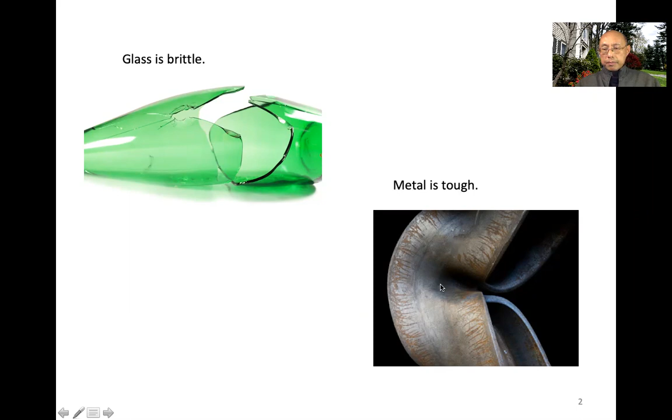We all know glass is brittle and metal is tough. The toughness in metal comes from plastic deformation. Rubber always appeals to people as a tough material, but it doesn't come from plasticity. Toughness doesn't come from plasticity.

So I'll call it elastic dissipator in the following sense. When material is being stretched, before fracture, there is no plasticity. When you release the load, the material releases elastically. However, if material is ruptured, all the elastic energy is dissipated. So this mechanism is what I will call elastic dissipator.

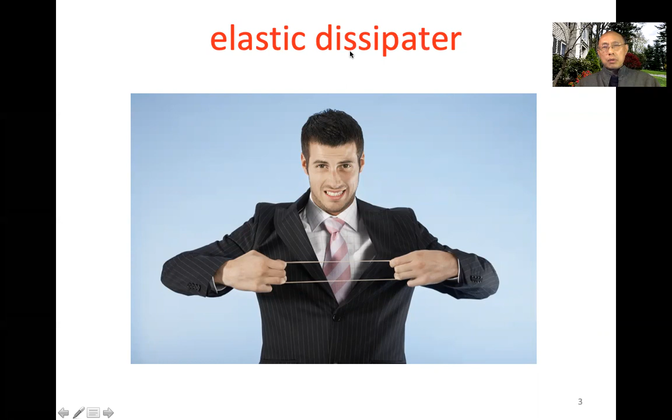Now, if you put this in the general context of a theory of fracture, you can think this way. It's well known, Griffith's theory of 1921, almost 100 years of history. Griffith considered glass as a model material, silica. Here is a glass, let's say just a simple model picture. You have an atomic bond between these two atoms.

So when a crack comes along, the crack only needs to cut one layer of atomic bonds. All the other atomic bonds remain bonded and the material is elastic. As a result, because you only cut one layer of atomic bonds, the toughness is very low. This is an energy per unit area of a crack, just about 1 joule per meter squared.

Now, we all know, if you have studied fracture mechanics, in 1948, Irwin and Orowan had a picture of a high toughness material. They were talking about steel. So the toughness is on the order of 10,000 or even 10 to the 5 joule per meter squared.

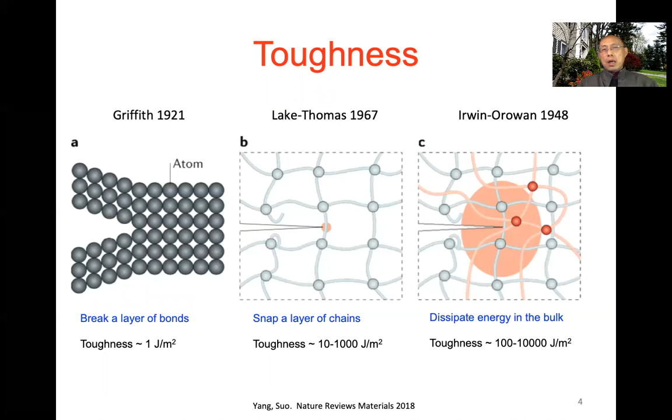So in recent years, myself and several other groups have been trying to create tough hydrogels. Here's one version we published in 2012. So the hydrogel is really very tough. Here is a hydrogel. Hydrogel is transparent. What you are looking at is a black background.

So we can stretch this hydrogel to 21 times. You can see, 21 times, very tough material. In order to measure toughness, fracture energy, we also use a blade to cut a crack and then stretch it 17 times. The crack does not grow. Instead, the crack becomes a hole. So this corresponds to very high toughness; this measurement gives us a high toughness value.

Now this high toughness puts things into context. For tofu and jello, the toughness is about 10 joule per meter squared. Most gels have this value. Contact lenses, 100 joule per meter squared. Cartilage, 1,000. Natural rubber without any reinforcement, 10,000. So our hydrogel with 90% weight percent water has a toughness comparable to natural rubber.

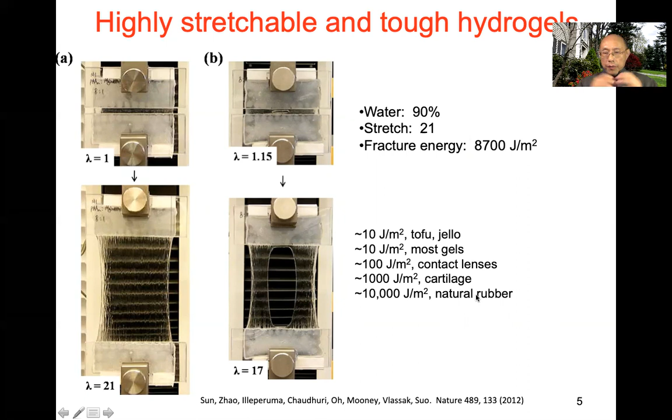Very tough behavior. Now, this behavior comes from something like plasticity. So we made our material by mixing polyacrylamide gel and alginate gel. Polyacrylamide gel is an elastic gel. Before this chain is broken, when a crack comes in, the whole chain is stretched to covalent strength. When this bond breaks, you release the energy of the entire chain like that. So in this case, for polyacrylamide gel, we measured the toughness to be about 100 joule per meter squared.

This alginate came from algae, so it's a biopolymer. This polymer has a negative charge on the chain, and in the water it's a hydrogel. In the water, you have a calcium ion, and these calcium ions bridge this negative charge. So this is an ionic crosslink. When a crack comes along, it needs to break this ionic bond, but it doesn't really break the ionic bond in the bulk. As a result, the toughness is low, on the order of tofu and jello, 10 joule per meter squared.

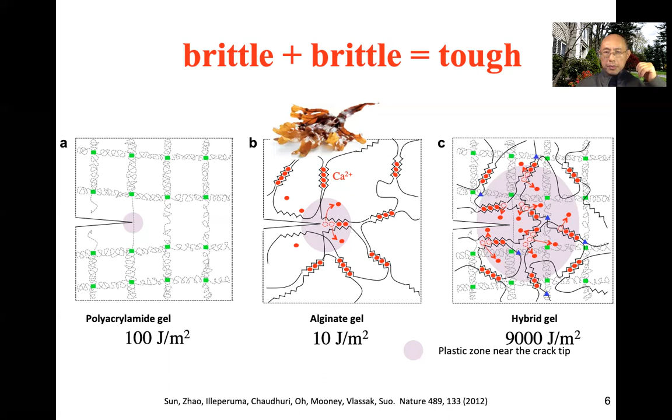By now, many people do similar things. However, this material has a problem: the problem is about fatigue. Fatigue is a kind of measurement many people in the field have been doing for decades. We are also doing this.

What you do is prepare a material, cut a crack, and apply cyclic loading. Observe crack length C growing cycle by cycle, and plot crack extension per cycle, dC/dN, where N is the number of cycles and dC is the crack extension, as a function of applied load. We and other people convert the applied cyclic load to something we call energy release rate. It's standard terminology in fracture mechanics.

For our material, if you monotonically load this thing, the crack extension is very large—in one cycle it already grows to the end. That is the toughness. Under monotonic loading, toughness is very high; in our material it's about 10,000.

However, when you reduce the load, reduce G, the number of cycles needed becomes larger, and the extension per cycle becomes smaller as load decreases. As load decreases more, dC/dN becomes even smaller, until at some threshold value, below this threshold, the crack no longer extends—no matter how many cycles you apply. For our tough gel, this threshold is about 50. That's a dramatic decrease of threshold.

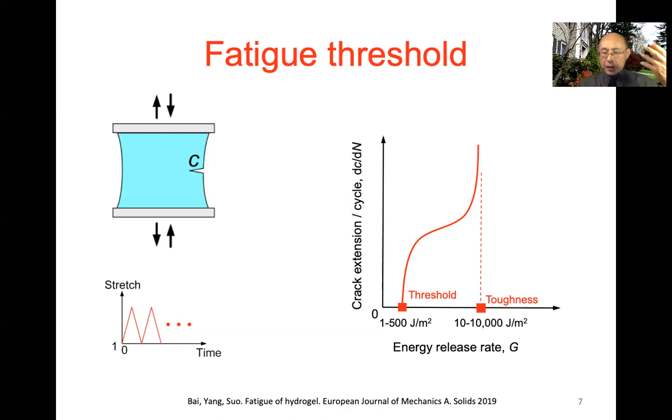This is also true for natural rubber. For decades, people have tried to enhance rubber. They can increase toughness even more than 10,000, but they cannot modify the threshold. Threshold for natural rubber is 50. Our hydrogel threshold is also 50. Terrible. So then we began to study the threshold.

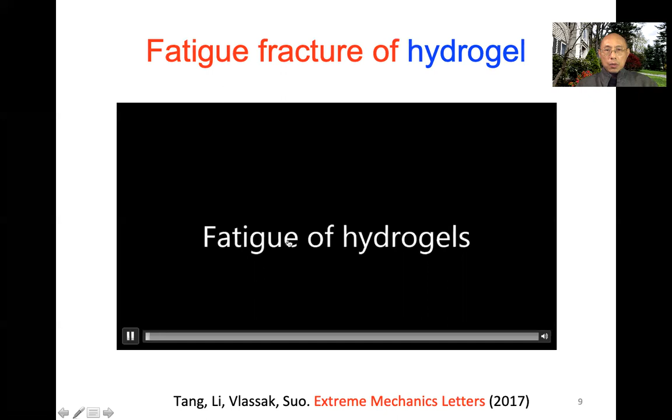Let me jump directly to an experimental picture—this is a video showing how it looks. We have polyacrylamide gel, transparent. On the surface of the gel, we mark with a red dye so we can see the location of the crack. We apply cyclic load, up and down, and the crack opens and closes. It doesn't look like it's growing, but it does grow slowly.

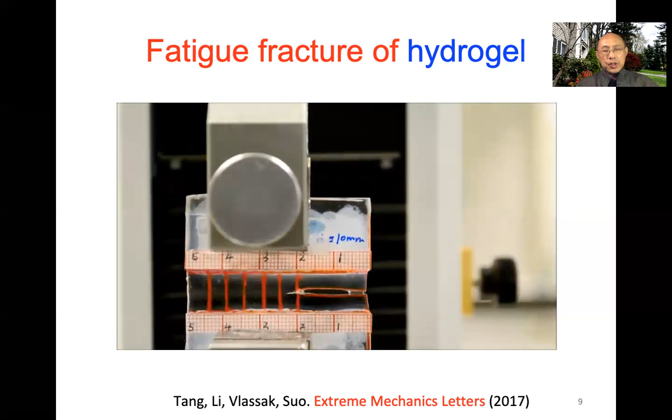Let me accelerate this video. You can see after some cycles, the crack already grows near to the second red mark. So even for this polyacrylamide gel, a very elastic gel, it still suffers fatigue crack growth. So we try to study this mechanism.

Now, this is our tough gel with calcium crosslink and also polyacrylamide—a mixture of two hydrogels, polyacrylamide and alginate. Remember, the toughness of this gel is very high, 10,000 joules per meter squared. However, when we do this experiment without any cut, just stress-strain measurement with cyclic loading on the tough gel—this is stress plotted against stretch.

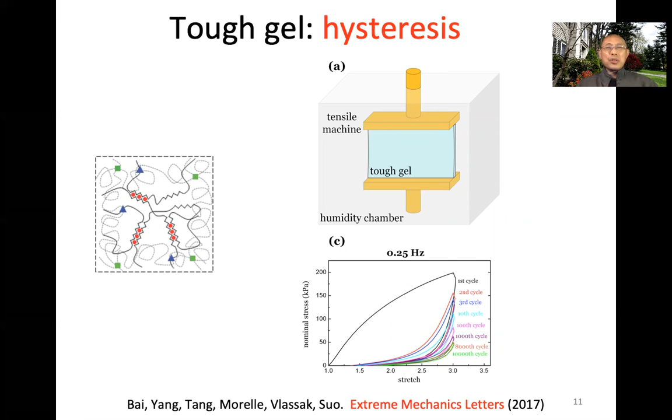First cycle loading up, this is the stress-strain curve. When you unload, you follow a different path—you have enormous hysteresis corresponding to the unzipping of these ionic crosslinks. When you do a second cycle of reloading, the ionic crosslinks don't re-zip, so the second cycle becomes much lower. As you go through more and more cycles—1,000 cycles, 10,000 cycles—the hysteresis curve keeps going down. This means you're damaging the material, unzipping ionic crosslinks more and more each cycle. That's essentially what causes the fatigue behavior.

We further measured this fatigue threshold. We cut a crack into the sample and measured dC/dN as a function of cyclic load. Indeed, the threshold is about 50 joules per meter squared—remember, this material's toughness is about 10,000, way higher. So this material is unfortunate: it's tough for the first loading, but it suffers fatigue fracture.

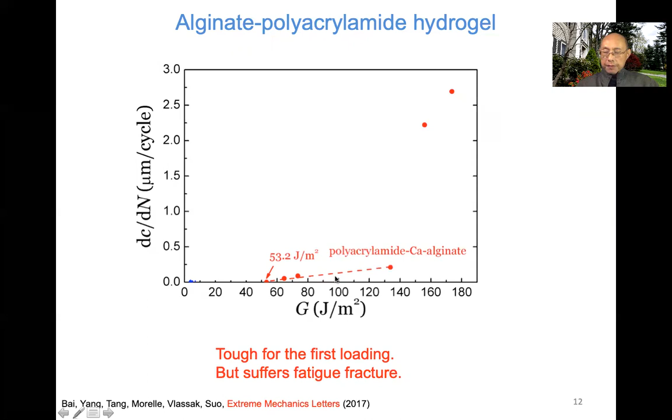This is our tough gel behavior. So at this point, we need some new idea. Now, this is a new idea. We say, how about we do this?

We made a material with two elastomers. One elastomer is stiffer than the other. We call this the stiffer elastomer fiber, so these are fibers, and the compliant elastomer is the matrix. Both elastomers are stretchable.

Now, if I cut a crack, let's say I mark a material particle by a square. When I apply a load, the matrix is so soft it can shear dramatically, allowing this crack to blunt much more than before. So this is the blunting, I call it H.

Then your toughness will scale with this H. Scale so that the toughness is this opening, and WF is the stretch curve all the way to fracture, the area under this curve.

So the point is, because there's enormous blunting, you deconcentrate stress, spreading it over a long distance of the fiber. In our case, it's on the order of millimeters to centimeters. Then, of course, when this fiber breaks, you dissipate energy over a long segment of fiber, H. So that's why your energy is very high.

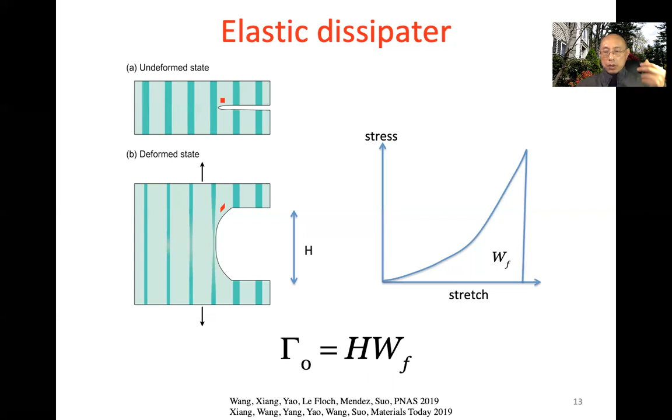However, when it breaks, you dissipate an enormous amount of energy, giving high toughness, and by this mechanism also a high fatigue threshold. So this is our hypothesis. We tested it by experiment.

So here's the experiment we do. We have a material, we make a composite, we make a cut, and do cyclic loading to measure the threshold. And then we also measure dissipation, the hysteresis, without any pre-cut.

We measure the stress-strain curve, loading and unloading. If a material is very elastic, this area, the loading and unloading curve, will be very close, so this area WD will be very small. We measure this amount of hysteresis by a dimensionless ratio, WD over W, meaning the hysteresis area over the entire area underneath the stretch curve.

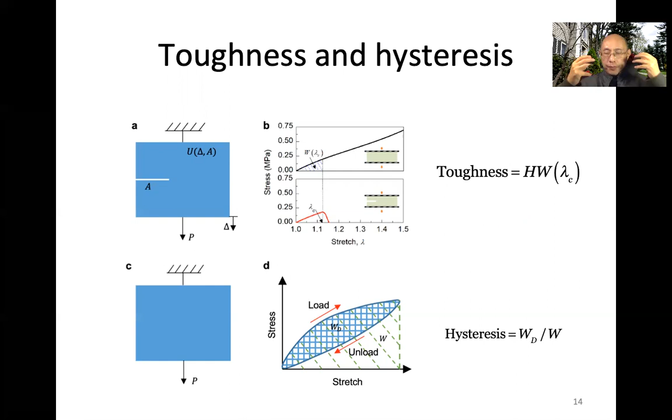So for most applications, you want to have a very small hysteresis, right? Doing loading and unloading with no energy dissipation. However, when a crack is extending, you need enormous energy dissipation. That's the ideal material you want. So this composite really achieves this behavior.

So here we plot the toughness and hysteresis. We want a material to have high toughness and low hysteresis. Now, among elastomers and hydrogels, this unfilled natural rubber actually fulfills this behavior. The hysteresis, at least for 20, 30% stretch, actually all the way to 100% stretch,

your hysteresis is quite small, less than 10%. But for all these other materials, including our tough hydrogel, the hysteresis, as I showed you, is enormous, and toughness is enormous. Now, for our composite, what we did was use two versions of PDMS, a stiff PDMS

and a soft PDMS. So with this composite, we can easily achieve toughness as high as natural rubber. Now, if you just test the homogeneous PDMS, this Sylgard we're using, the toughness is very low, about several hundred joules per meter squared. It doesn't matter if you make it soft or hard, as long as it is homogeneous, the toughness of PDMS is low. People have experience

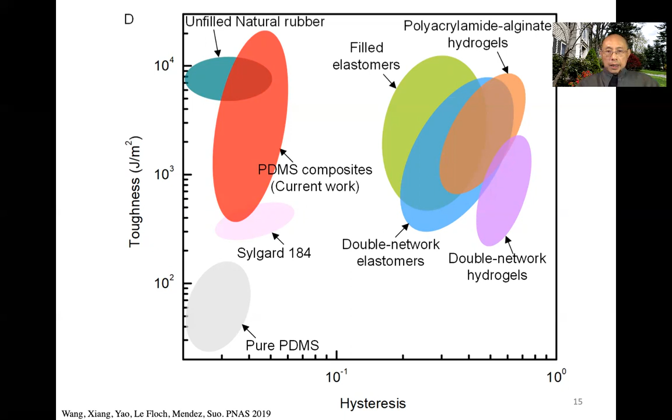that PDMS is much more brittle than natural rubber. That's common experience. All right, so we also made a version of composite using a hydrogel matrix, with the fiber being PDMS. So here's a fiber and a matrix, and we tested it under cyclic loading.

So under a number of cycles and the applied load, as the load becomes smaller and smaller, the number of cycles you can apply without causing any damage increases. So this is 30,000 cycles, still no damage. Keep cycling, no damage.

This G is already beyond 1,000 joules per meter squared. So this is a unit of kilojoules per meter squared. So that's the threshold, the new value of the threshold.

The point is, even for natural rubber, the best threshold we know about is about 50 joules per meter squared. However, for this composite, the material we use is just lousy material, PDMS and hydrogel, yet the threshold reaches 1,000 joules per meter squared.

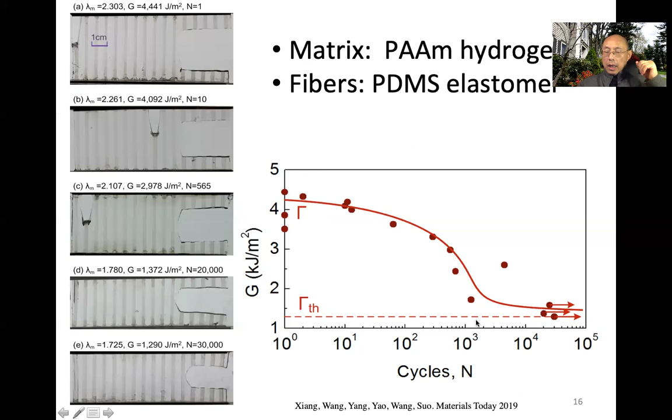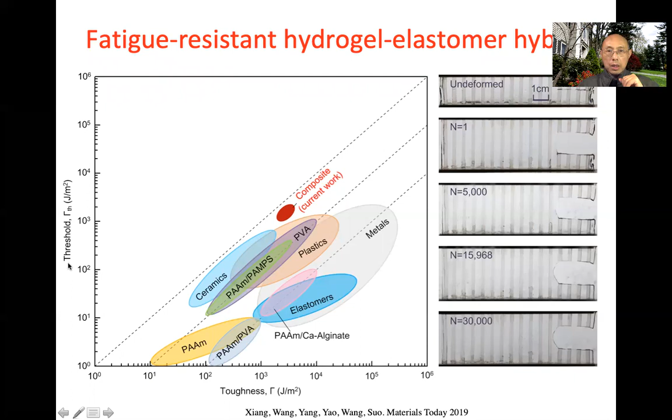Various ways of enhancing elastomer, for example carbon black or silica particles, do not change the threshold very much. You can change toughness enormously, but the threshold is still on the order of 100, less than 100 joules per meter squared. However, our material achieves a high value of threshold.

So now the idea is also valid for not just fiber reinforced material. Here we made an elastomer using two versions of elastomer. One, we print one version of elastomer, stiff elastomer, and pour the soft elastomer as a matrix. So this is a sample prepared.

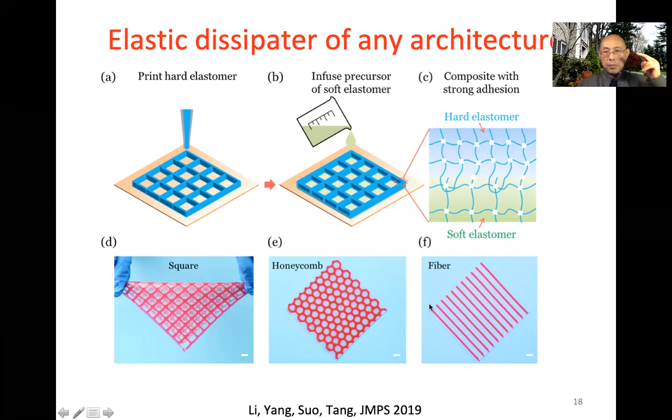This material is also fatigue resistant. So here is our data, threshold, toughness. This work achieves 700 or so joules per meter squared for threshold—enormous compared to regular elastomer.

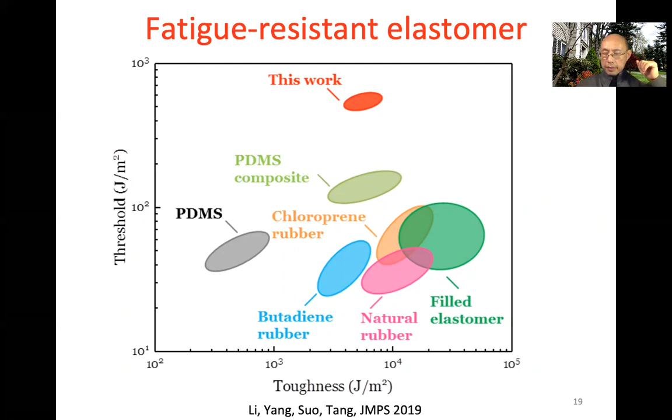This is what you do: you can still have a stretchable material, elastomer, but it's fatigue resistant. All right, so here's another story related to fatigue.

One idea of enhancing fatigue coming from the Lake Thomas model is you increase the chain length—how many monomers. This little n is how many monomers between two cross links. And so fatigue threshold scales with the square root of n.

Then you might ask why people didn't know this. People, of course, know this. But if you make material with very long chains, your elastic modulus, Young's modulus, will decrease, because the Young's modulus scales with 1/n. So there is a stiffness-threshold conflict in the material. When you make an elastomer, you reach a compromise—you use some reasonable n. You cannot use very large n to make a material.

So here are the data in the literature—indeed it follows this threshold-stiffness conflict. They have a negative slope of about 0.5, coming from these two relations—this is the square root. This is a log plot. For hydrogel, this is even worse because you have 90% water, but it still follows this kind of relation.

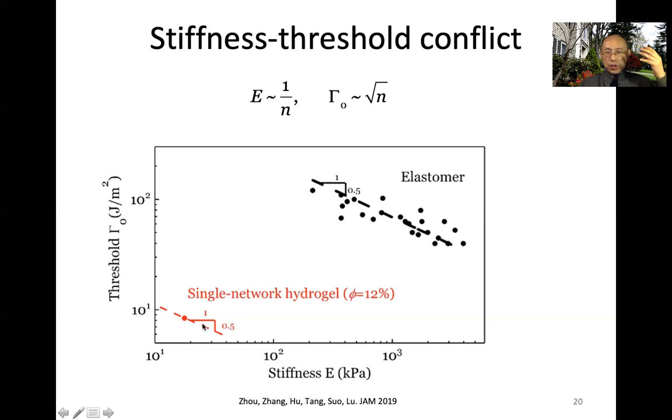Now suppose we do the following: we make a double network hydrogel. Since Jianping Gong made this gel almost 20 years ago, many people have studied the properties of a double network hydrogel. Our group pushed this—we started to study the fatigue of this double network hydrogel. Here's our conclusion.

So now, if you only have a single network hydrogel, I just told you there's a conflict. If you choose a chain very long, you have a very small modulus, very high fatigue threshold. So fatigue threshold wins, that's good, but stiffness is too low. If you make the chain very short, modulus is great, but fatigue threshold is low. Now you have a conflict.

However, if you make a double network—there's a polymer network A, you make polymer network A with a short chain so that you have enormous modulus. And then you have another network with a very long chain, polymer network B, you get high threshold. This double network will have both high modulus and also high threshold, so it's both stiff and fatigue resistant.

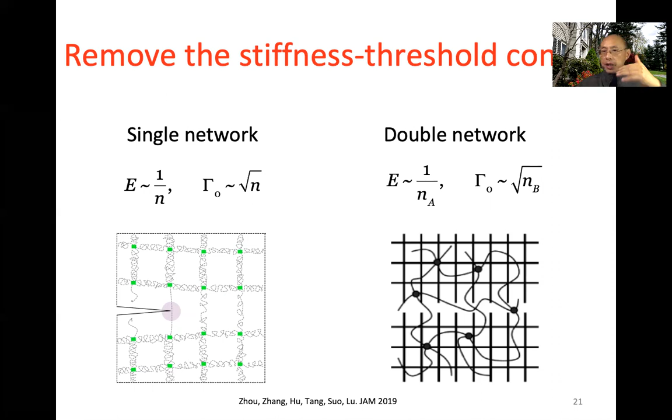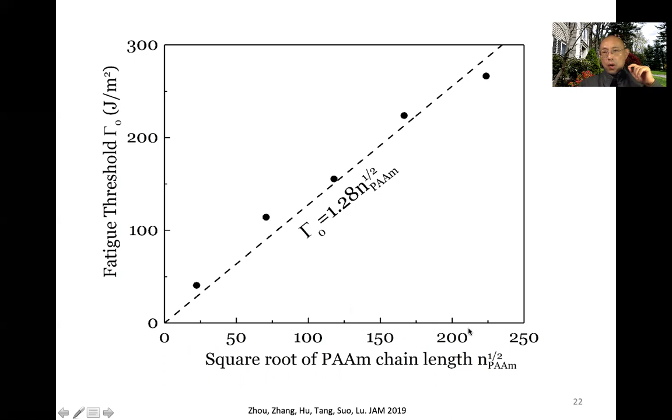So here's our experimental data of fatigue threshold as a function of the number of monomers per chain. You can see as the number of monomers increases, our fatigue threshold does increase, all the way to several hundred joules per meter squared.

So here is our data of threshold plotted against stiffness. I told you all the traditional hydrogel is somewhere here—not very stiff and not very fatigue resistant. However, if you make this double network, this work, you can push the material all the way to elastomer level, while still having 80–90% water.

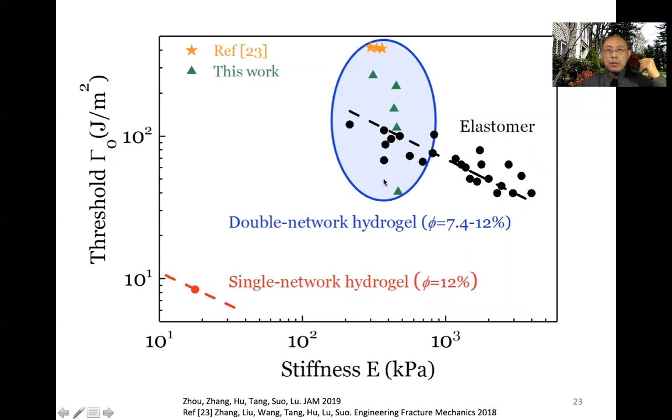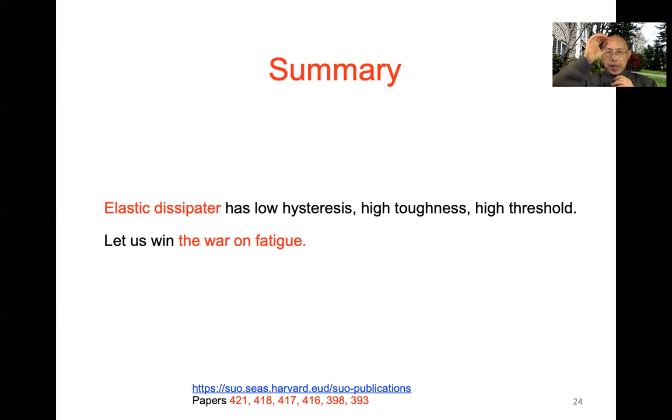That's great. Now let me summarize the talk today. So this idea, elastic dissipator, started with an elementary picture from Lake Thomas, where an individual polymer chain can release the entire energy of the chain. It's an elastic dissipator—you don't need to dissipate energy through plasticity.

The consequence of this elastic dissipator is you have low hysteresis. It's very good for applications, many applications. And you can have high toughness, also high fatigue threshold. I think now we have a handle to win this war on fatigue.

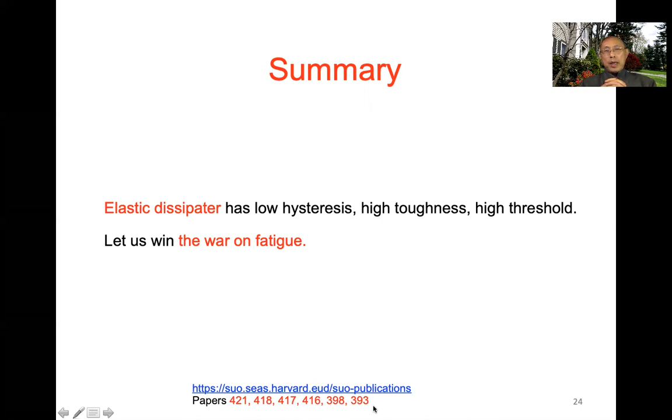So all our work, our papers are posted on our website, and these are particular papers related to this talk. Thank you very much.